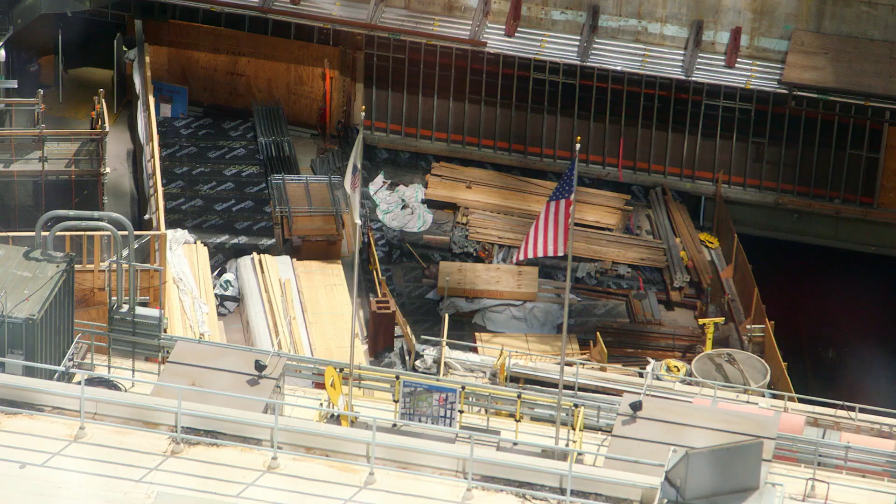There was a great public outcry to replace the buildings. The government decided that the replacement should become a matter of public decision. What we needed to do was make a statement, and that statement needed to be in the form of buildings, but driven by people.

This was a lot of challenge, a lot of pressure, a lot of eyes looking at us, and frankly a lot of self-doubt about were we doing the right thing and how were we responding to the challenges of rebuilding after 9/11. The entire engineering community, the construction industry, everybody basically went back into a soul searching. We had to think what it means. We had to think what is expected from us, not only by the developer, but primarily by the public.

There was a lot of pressure to design a building that was special, but there was also a lot of pressure to make sure that it was the best practices brought to bear. One World Trade Center faced a Janus task. It had to stand tall without displaying any hubris. Almost impossible for a building that's the tallest building in the Western Hemisphere.

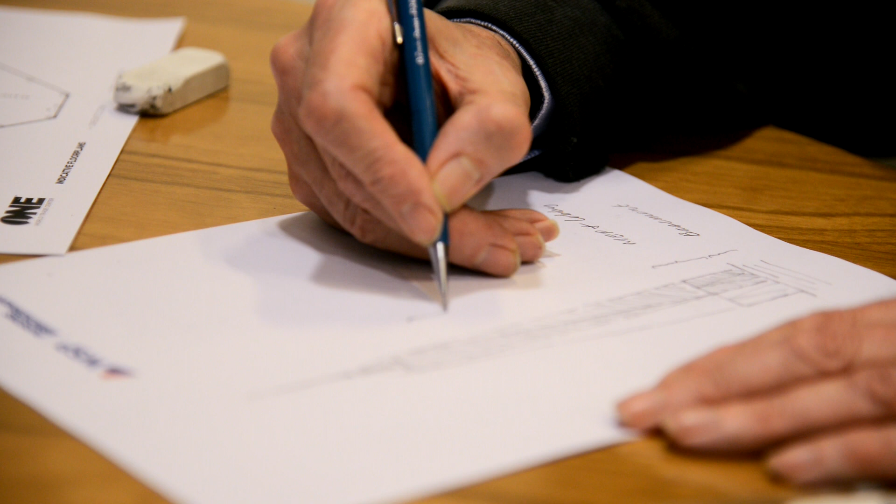Designing a building is never an easy task. Designing a super tall building is even harder. And now here we're faced with the challenge of designing a super tall building in New York City with the world watching us. They began to look at why were these structures so vulnerable? What can we do better in the future?

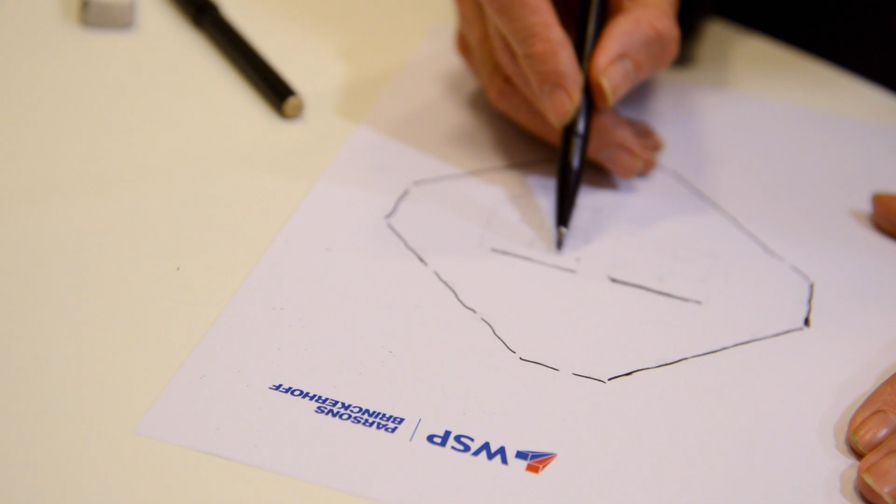We knew that the current codes will not be sufficient, so we had to basically design the building to satisfy a future code that hasn't been written yet. So we had to collect a lot of the reports that were available at that time and basically use our judgment. You don't want to make new rules that would be too conservative and basically cause dramatic increase in costs. It all has to be reasonable, but obviously address the issue.

I think the confidence we had in each other allowed us to come up with the right choice well ahead of the code being changed. And now we find that the code is actually matching our ideas.

We always thought this building should be about simplicity and geometry. Clean, strong, monumental as possible. And that meant making it look as simple as possible, although the building is far, far from simple. The height of the building in profile to the top of the parapet is exactly the height of the original Trade Center. So there was some remembrance that we wanted to infuse the building with.

Then of course there's the geometry of tilting those walls in and the cleanliness of it and the base and how to make all that work together. So it was really quite a lot of things coming together. And then of course the last item is the life safety issues.

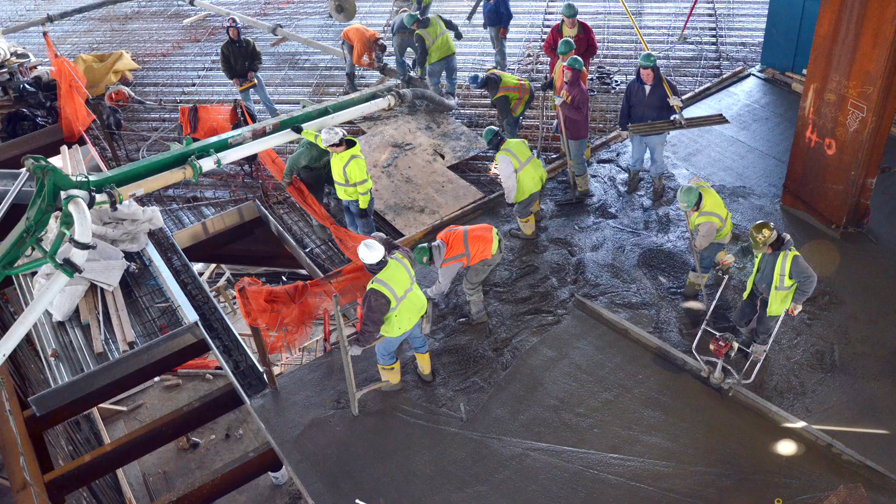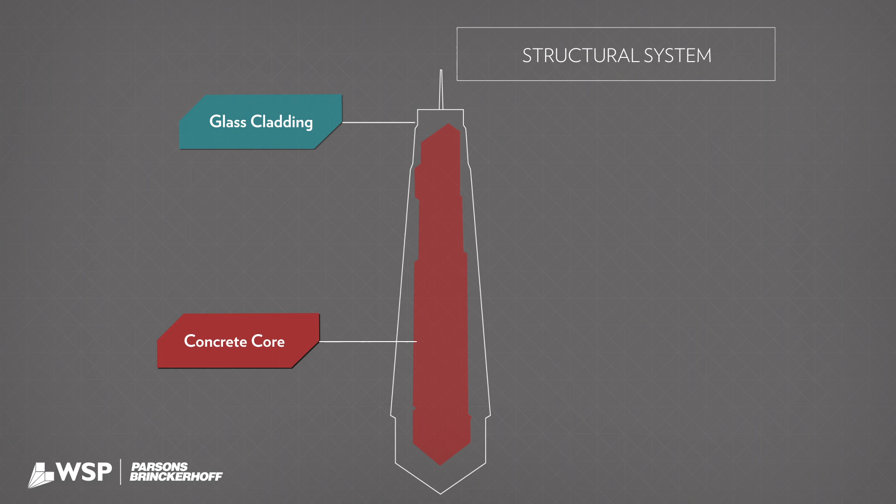One thing we could do, and we actually were proponents of it, it would be better to have a robust concrete core. So the concrete core adds stiffness to a very slender building like this, but more importantly, it houses all of the safety and security services. For the first time in the city, we introduced a 14,000 PSI concrete. It's much stronger than any rock that you could find.

The office building, because of the large spans that they want to have, lent itself to a steel structure. So now combining a concrete core with a steel structure is not an easy task.

It's not that unusual in many places around the world, but in New York City, because of union issues, this was something that we were pushing the envelope on. It was great team effort between Tishman Construction, who built it, WSP, who engineered it, and us at SOM to make this work in a new way.

What is less visible to the public, there is a whole city on grade and below, and it extends way beyond the footprint of the tower. We came quickly to a decision that we would locate critical services for the entire function of the space, including the train station, the retail spaces, the towers themselves, in the safest possible locations.

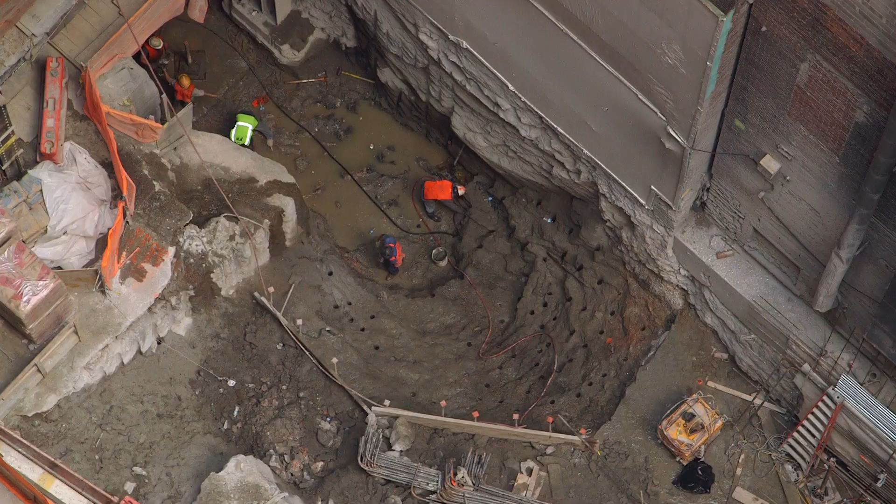We have vertical shafts in the towers that service the train station. So there was a constant dialogue between projects to plan how these services could be routed. So that on its own created significant challenge and rethinking how to go about not only the design but also construction. This extraordinary, 85-foot deep foundation had to come to ground level.

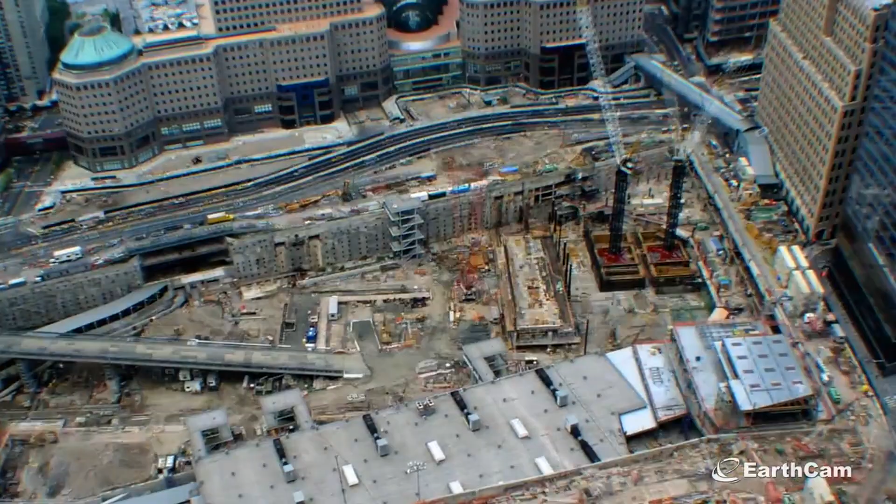And then once the steel emerged above ground, once everyone could see that, yes, we have a building, it was a tremendous relief for everyone working on it. What did it feel like when it came above grade? I guess it was, one, a sigh of relief, because as towers go, the thought process was already developed and the equipment was already in place.

The building itself is a prism. It reflects light. Actually, if you stand back for miles and look at it, the light bounces off. That luminous light becomes part of One World Trade Center's palette. The building constantly changes. It's a very experiential building. The more you look at it, the more you see.

One of the greatest attributes of the building is that we were able to make it democratic. Everybody can come in the building and go up to the top to the observation deck. And that was something that existed originally and something that we definitely wanted to have again, and that is the opportunity for everybody to experience this building in some manner.

Prospective tenants, their first reaction is a jaw-dropping one of a great gasp as they approach the windows and see the view to, frankly, the Atlantic Ocean. And then as they walk the floor, they realize the great depth of the floor plate. I think for the most part it's a little bit of shock and awe, and people are very impressed with the construction.

The building itself has really become a catalyst for the whole area, for the whole Lower Manhattan, for New York City itself. It's amazing how people embrace the new design. And so you see a lot of people walking around, sitting there, enjoying the environment, enjoying the park and the whole vibrant nature of the new design and environment that is being provided.